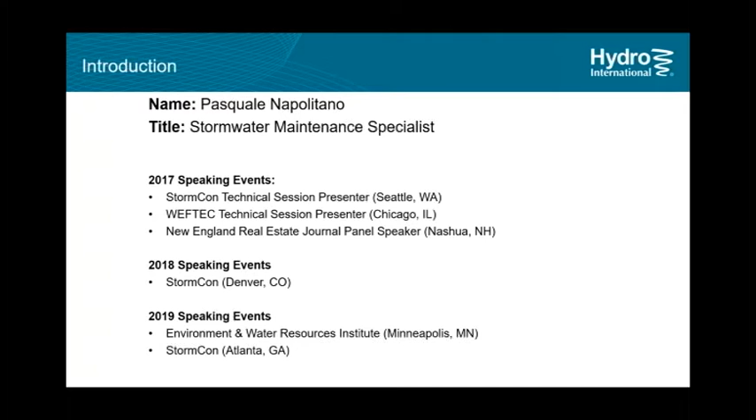So if you've attended one of those sessions before, I'm going to try to change things up a little bit more this time. I want to keep things even more visual than usual. I feel we've all been cooped up for quite a while now, so I did want to keep things a little bit more visual in that sense. So you should see some new things, but I'll also be touching on some other key points from before.

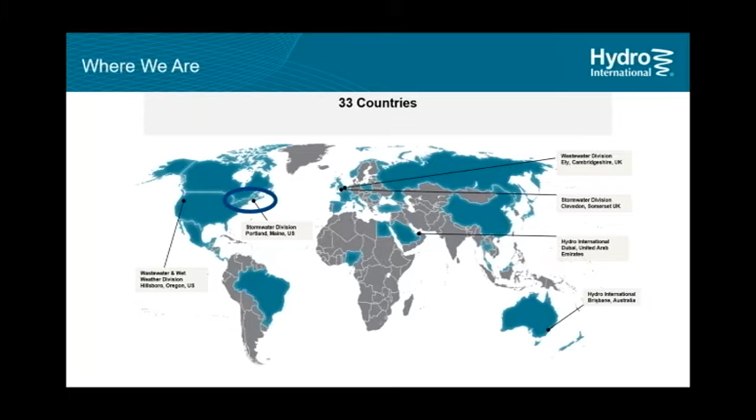As far as where we are, Hydro International, as the name suggests, is an international company. I'm in the Portland, Maine office, our stormwater headquarters for North America. We have folks all over the country, the continent, of course. I just happen to be located out of the Maine office.

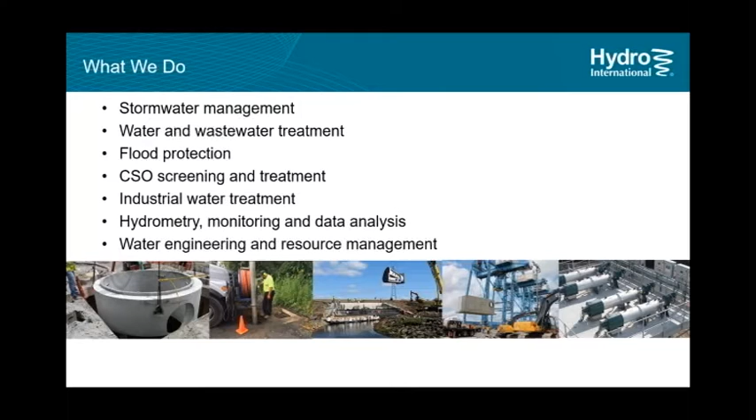What do we do? Real quick, if it's related to water, we do it. Wastewater, stormwater, CSO, pretty much everything industrial water, either on the process water side or surface water side, flood management. The Americas stormwater office has been around for 30 plus years. We manufacture BMPs. We have an in-house lab where we do testing. We have thousands of separators and filters installed across the world.

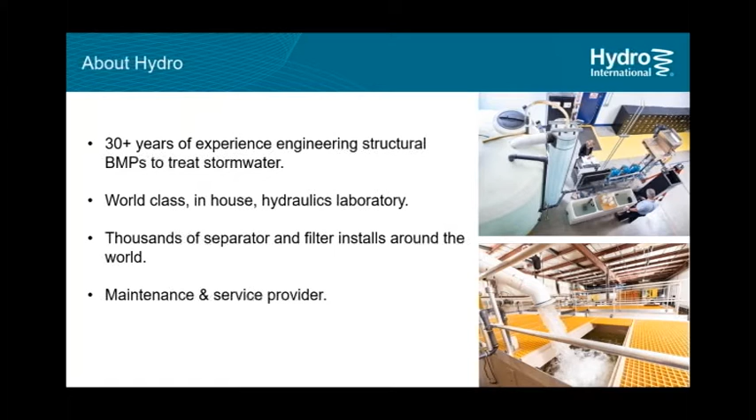And again, a maintenance and service provider. So we not only develop, engineer and manufacture treatment and proprietary products in-house, we test them in-house. We also have them installed all over, and we also service these afterwards. So we're uniquely positioned in the sense that we're working with regulators, specifying engineers, contractors, business owners, all the players involved in a stormwater BMP's life.

So why are we talking about maintenance? Well, the truth is, and I don't think this is a surprise to anyone, the majority of stormwater BMPs don't receive routine inspection or maintenance. Since we're a manufacturer, we can look at our own records, specifically for filters, because filters need to be replaced every so often, and we can see how often that is happening based on the installation base. Less than 20% are probably doing this regularly.

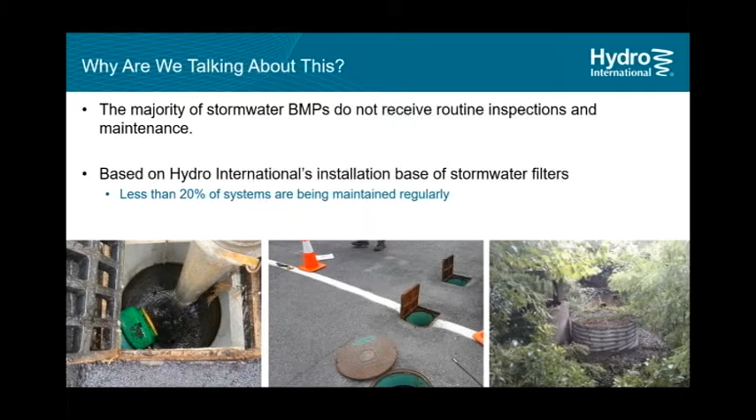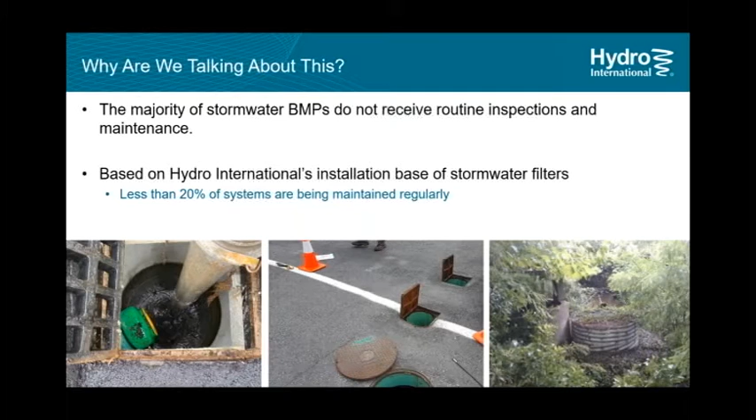Over a 5-year period, that 20% wasn't always 20%, it was lower than that before. As much as I'd like to pat myself on the back for that, it's not necessarily the case. I think the industry as a whole has been moving towards this. In some of the later slides, I intend to show you what I see as some of the driving factors in awareness and gaining more compliance for stormwater inspections and maintenance. But again, 20% doesn't really cut it. We need more than that.

What's the result of having little to no compliance? Well, if stormwater BMPs are not inspected and maintained, the structures fail. It's really that simple. Some photos here included a bioinfiltration system. You have some catch basins that are completely covered. You can't tell that they're there, or what's in there. And one of them has 7 feet of debris.

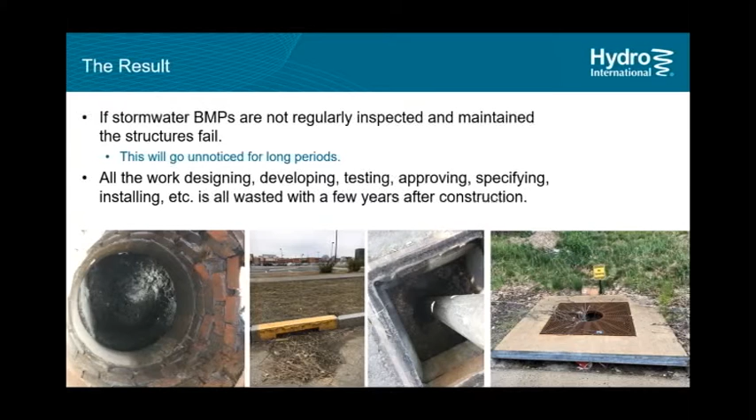This is not great. Not inspecting means that things go unnoticed. So if you imagine all the work that goes into, if you are a municipal engineer, approving projects, if you're a specifying engineer, putting in the soil and erosion control measures, specifying the product for the treatment that's needed for the site, all that work, 12, 24 months later, if no one's doing anything, it's like there was nothing there, or worse, things can kind of get out of control.

So it's really important that best management practices are seen as an ongoing thing. These are not something that just gets installed and then it's done its job and you move on. Really, stormwater BMPs need to be something that's constantly being checked on and worked on.

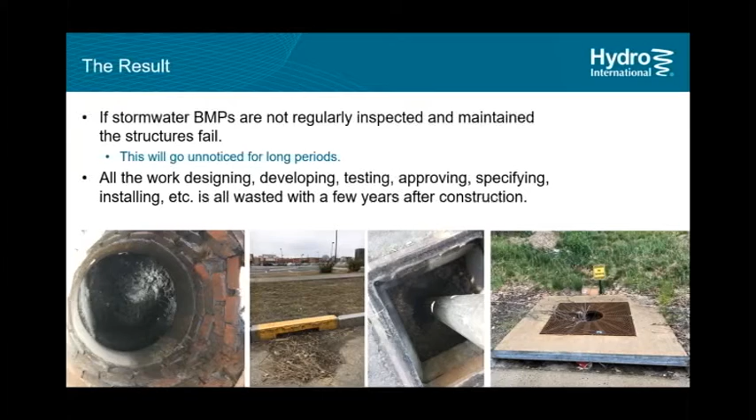Why does this happen? I've done a whole paper on this, so I won't touch on it a bunch here, but the gist of it is that there's a lot of players involved. Again, there's specifying engineers, there's approval agencies, and there are contractors, subcontractors, manufacturers involved. And in the end, maybe a developer sells the property, leases the property, properties change hands. It very quickly turns into a bad game of telephone.

And so basically the lack of awareness, and I guess lack of regulatory enforcement is unfair, but just the sense that a lot of emphasis gets put on permitting for new construction. And the same emphasis or resources often aren't given for the back end of that, which is the regulatory enforcement to ensure that these systems are being maintained afterwards. But again, that big factor is communication.

And I put the little old lady here with the plans because it's funny, but it's true. I spent almost my entire morning this morning talking to homeowners and people who represented large box stores who didn't know they had something, trying to get it fixed. So it's very common for people not to know what's going on or how it happened or that they had anything.

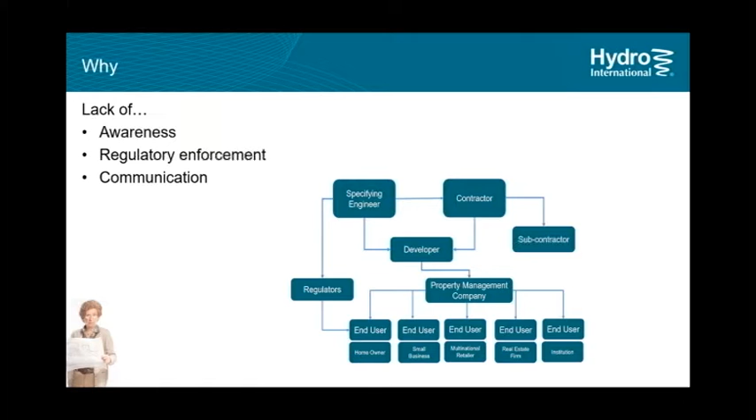To make matters worse, again, maybe a little bit harsh, but the EPA obviously has its regulations and they're vague, but not vague in a bad way. It's there to be interpreted so that local communities can interpret how they need to. Rainfall in Nevada is not the same as rainfall in Florida. So it is intentional to an extent that there's room for interpretation of how these should be implemented in various areas.

So that's not necessarily a bad thing in and of itself, but as this gets passed along, it all gets interpreted differently and people are taking different ways on how to do this. Different phase 2 municipalities are handling things differently. And so it can get really confusing and some things work and some things don't. And that confusion perpetuates this issue of people not knowing what's going on, or the end user or property owner knowing what to do.

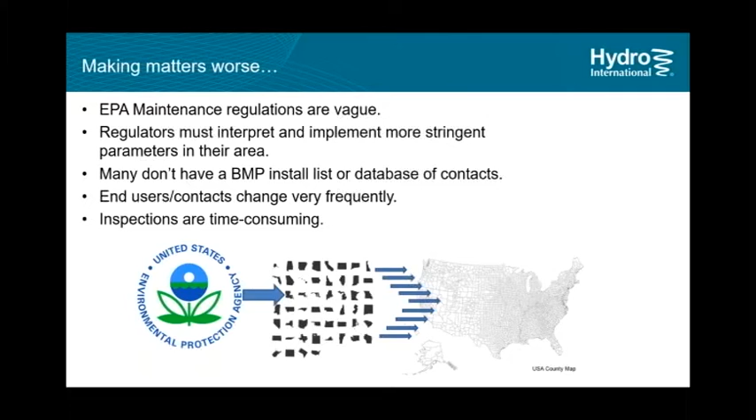Now, for the rest of the presentation, as I mentioned, I wanted to be pretty visual, so I wanted to show you case studies of BMP maintenance in practice. Before I get into that, we do have a poll for the webinar that I wanted to run. I was curious to see, out of the attendees, have you witnessed stormwater servicing or maintenance in person? It can be paving stones or catch basins or underground filter vaults or something as simple as bioretention or swales being mowed or trimmed. Is this something that you've seen before or something you don't get that hands-on with? So I'm going to attempt to run a poll here.

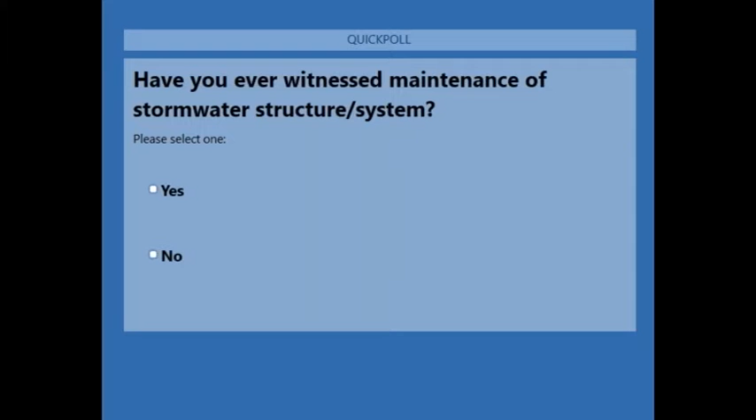Bear with me while I get it to start. All right, let me see here. I'll see if I can share the results with all of you.

So it looks pretty evenly split. About three quarters of everyone voted. More folks than not said that they have witnessed stormwater maintenance, which is good to hear because stormwater BMPs can be a whole array of things. So it is good to hear that something as simple can be seen. Maybe not everyone's seen full-on confined space entry or underground filtration services, but if you've seen something, it's certainly better than nothing. So I'll close the poll now, and I'll jump through some of these case studies and walk through what happens.

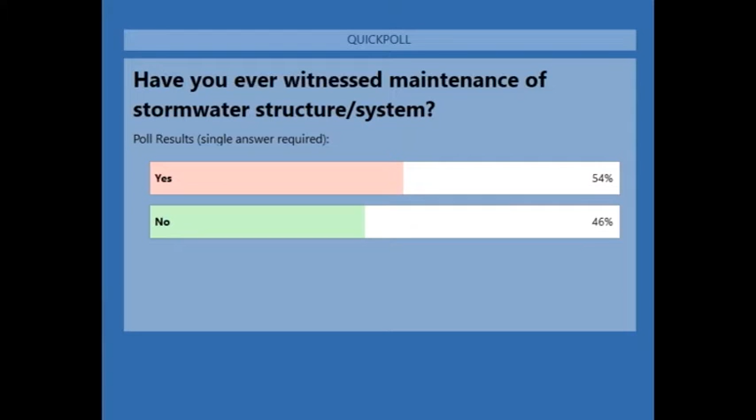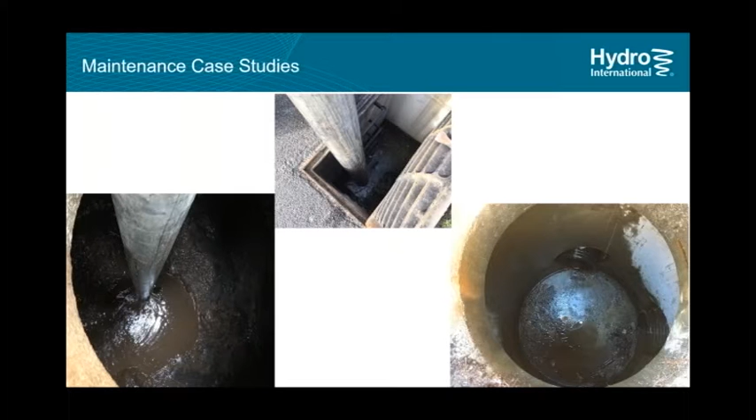So here we're going to get into maintenance case studies. Some photos here, just sort of your standard catch basin cleanings, some with more material than others. Typically, you're going to find sediment, dirt, sand, grit. You will find maybe dissolved organics, leaves, grass clippings, things like that. Trash. Those are the normal things you can expect to find, depending on the site use. If there's fueling, you may find some gasoline sheen, diesel, things like that. Or you may find worse things.

What I want to do, though, is take the more common stormwater BMPs, take a little bit of gray, a little bit of green, some proprietary systems, and take examples from across the country, from Hawaii to New York, and just give a range of what we typically see and walk you through it. So maybe you have seen corrugated metal pipe detention cleanings. You've been on site for a CMP cleaning, but maybe you haven't actually been inside the chambers or in the rows and seen what happens. So that's what I want to show you.

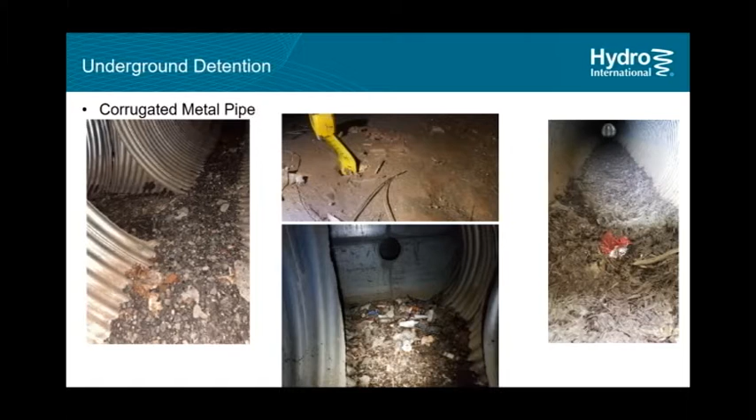Again, you get your dirt, your silt, your trash, and leaves or mulch can get in there. And again, construction debris is a huge one. Sites that have not the best erosion control measures, a lot of the stuff can get into the chambers and stay there, unknown. In the top photo there, you can see about 7 inches of silt in the CMP detention. So, how do we clean this? Well, you install maintenance manholes. Sometimes they're at a manifold at the end, sometimes they're in the center, to get down in there and clean them.

But what's important to note about actually maintaining underground detention, and it's not unique to CMP detention, is that it takes a lot of work. There's a good amount of manual labor in terms of pushing and shoveling material to where there's a maintenance access, then flushing and pumping, a combination of power washing and pumping to get the material out. So it can be labor intensive and time intensive as well. But as you can see from the photos, these systems obviously can be cleaned. They work very well for what they get installed for.

So they're great devices, but you just need to be cognizant of the fact that when these need to be cleaned, it costs money. And that's probably the biggest thing I encounter when speaking with property owners: it's not even on their radar. It's not in their budget as something they have to do. Explaining that this needs to happen in routine intervals is something that, if as a stormwater community we can get in front of, I think helps compliance along.

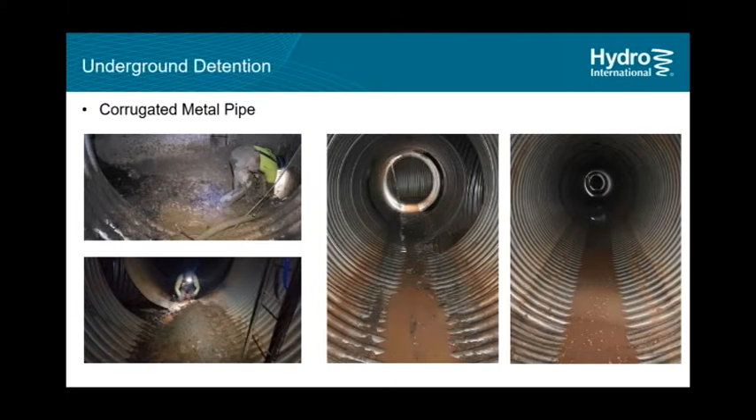Now, these systems typically don't require the same sort of manned entry that you would see with an 8-foot or 6-foot diameter CMP structure. What you would do is put a nozzle on the end of a jetter, let it run down the rows, flush it out to an access manifold, and then pump that out with the vacuum truck. But if things get blocked up, this will stop working, and sites can flood or things can break. So it's really important to inspect to know when the structures need service.

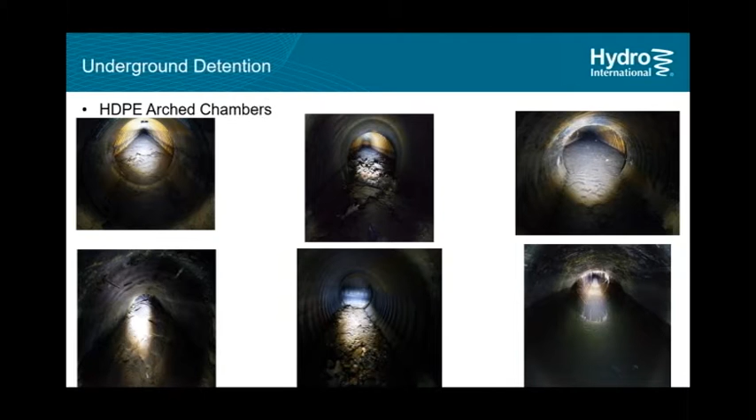Some of these types of devices, as you can see in the first photo, will have inspection ports where you can stick down and see how many inches of material is in there and whether it's ready for servicing. They tend to be optional, so these inspection ports are not always installed. I would recommend to please always put those in. It makes a world of difference. Sometimes you do just need to get into the access manhole and look down the manifold, as these photos show, to really get an idea. But inspection ports really are your friend.

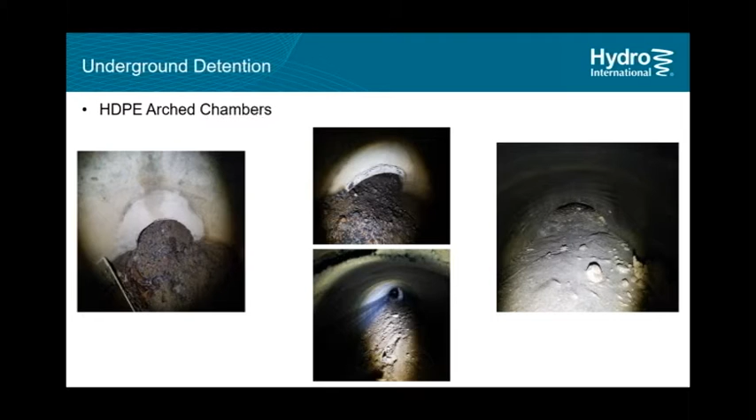Just a couple more examples of the same device that I just showed, those same rows. These are the access manholes, or some of them, that we had to get down into to see down the rows. And you can see they're just completely filled with material. So obviously the system's at this point failing or near failing.

But once you've jetted it and once you flush and you pump everything out, they're clean and they're operating again, and things are fine. So again, this is a common form of underground detention. It can certainly be cleaned, but you don't ever want to let it get as bad as the photos I just showed you.

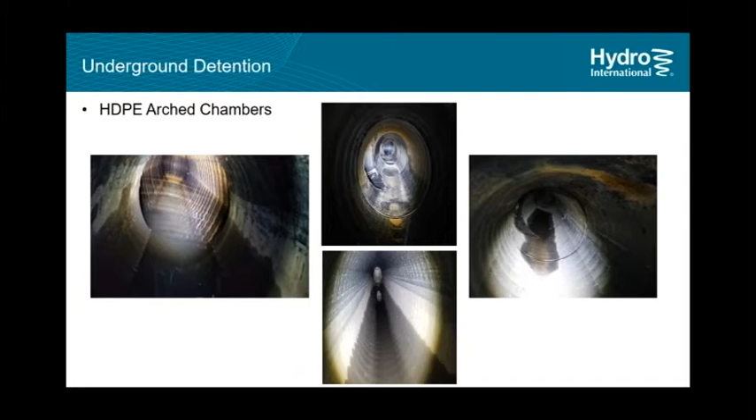How do you clean it? It's pretty similar. You power wash, you vacuum out. If you do need to get down, you have the access to do so. If you don't need to, you don't have to. This particular unit we serviced was a rather small-sized detention structure, but we do have properties that we work with, and the owners have it almost across the entirety of their pavement, their impervious area, and so that's a different animal, and that takes a lot of time.

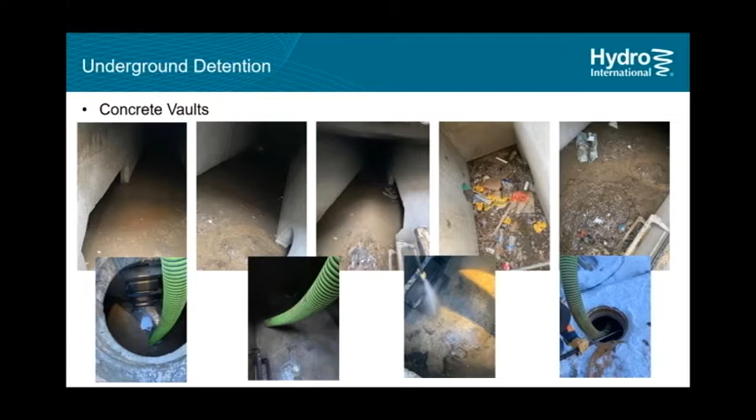But this is just to show you, your vacuum truck, power wash. If you need it, you can enter. If you don't need to, you can get it cleaned and have the system operating as it should.

I think in terms of proprietary devices, stormwater separators, hydrodynamic separators are probably some of the more popular ones. Certainly within the last 20 years, probably the most popular. You see some other devices now and approaches coming on the market, but these are the ones you see quite a bit by sheer volume of what's out there for stormwater BMPs. I would say stormwater separators, hydrodynamic separators are it.

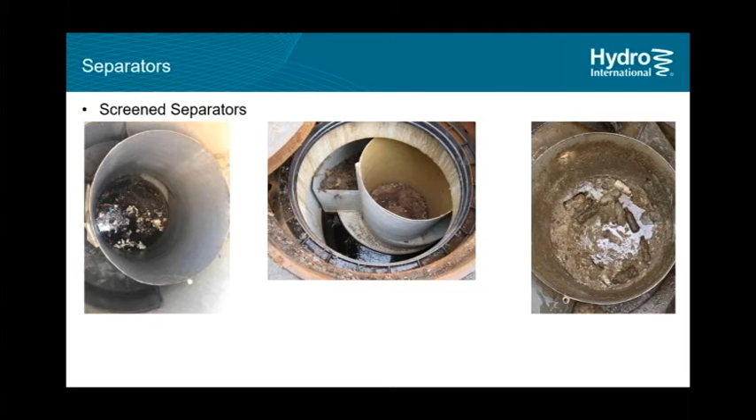These are some examples of some proprietary screened separators. See, they're doing the job, capturing leaves, trash. One example there has obviously been contaminated with cooking grease, not what it's intended for. But the key to point out is for any type of screened proprietary device, not necessarily this one, but all of them, if you're not cleaning them or inspecting them often, those screens will blind. So though the screens are great, they're helping, if you're not looking at these, they will blind, and then the whole thing won't work.

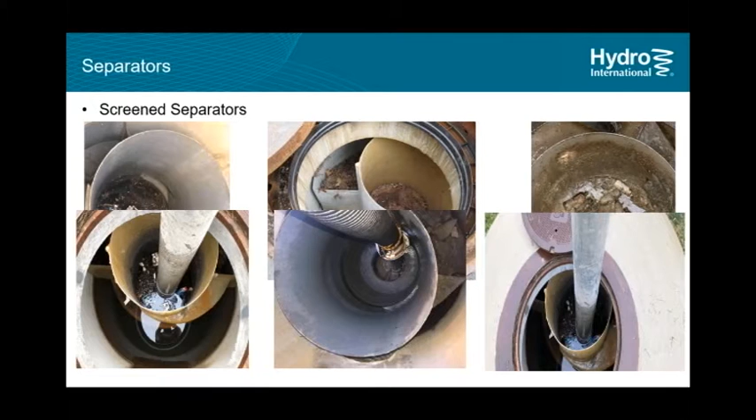Again, your vacuum truck, either a flexible hose or the standard size aluminum boom that comes down, you can clean these devices out and have them operating back to the way they should be. And I would, again, just based on how many of these are installed, these are one of the more common things. So if you've seen a vacuum truck pumping, it's probably pumping a catch basin or a stormwater separator.

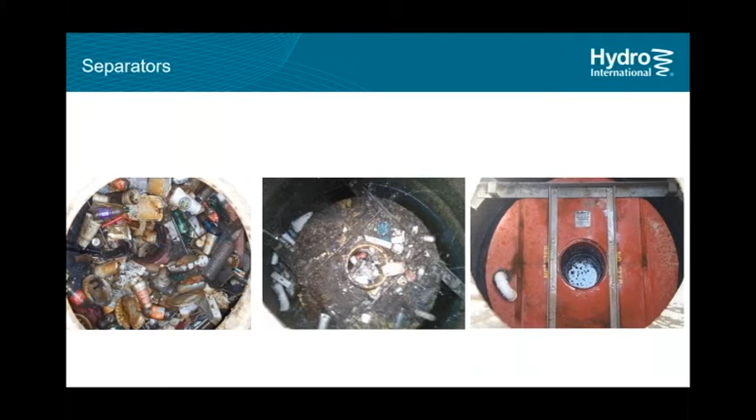Here's another model. This is a model that Hydro International manufactures. This is Downstream Defender. We've been making this for some 30 years. And again, it's doing its job. Looks filthy. It's good because it's there and it's not downstream. Oils, trash, organic debris. They get into the system, and you need to get it out. Ideally, you never see it get this bad, though, right? So yes, it's doing its job, but you want to avoid things getting to this point.

How do you clean it? It's really simple. Again, the vacuum truck, you drop down the standard size aluminum booms that go down, clean out the sump, clean out the floatable area. The structure is good to go.

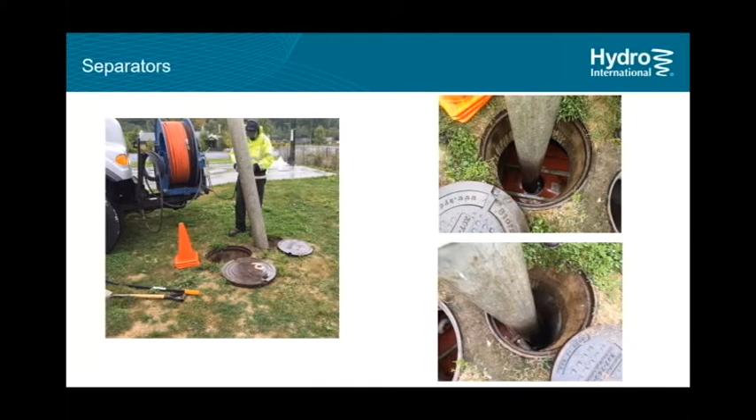A lot of stormwater separators kind of come in those standard precast manhole sizes, your 4, 6, 8, 10-foot diameters, even 12. More common in the last 5 or so years, you're starting to see 3, 5-foot variations of this. But round structures, separator inside it. These trucks can go and clean these out. For anyone who's used to doing this, it can be like clockwork.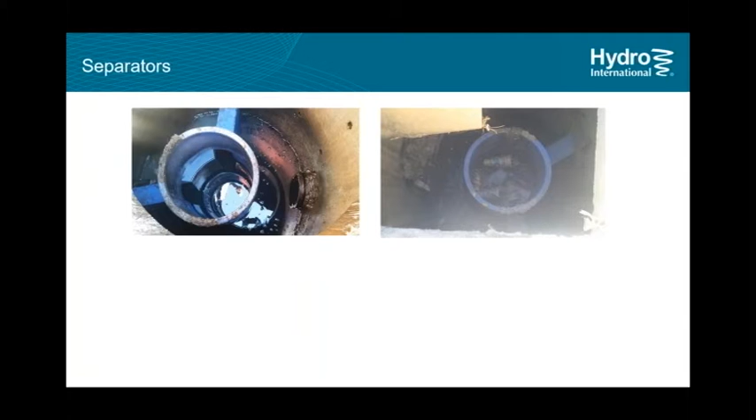And here's another model. This is a different model. Again, this is a Hydro International model. This is the First Defense, but the same idea. Here you have oil coming in, being trapped, not hitting the outfall, the outlet of the structure. Another example with trash inside there.

Same thing. Bring the truck, drop the boom, clean it out. What I will mention as well, universal to all stormwater separators, is just because you don't have a lot of, say, material on the sump floor doesn't mean you shouldn't clean it every so often, because by not cleaning it, a lot of that silt and dirt can get stuck there. You can almost create a false sump where you're starting to lose your storage volume because it's really hard to get out. So that's where the PSI power washer is really helpful in breaking that material out.

If you have a structure that's 18 feet down, that changes things. You can get a wand extension to help get down there, but in some cases, for some types of separators, you may have to enter it. And ideally, you never have to enter a separator. So preventative maintenance is way better than waiting until something gets completely full or 75% full, and then you're finding that it's very tricky to get the material out.

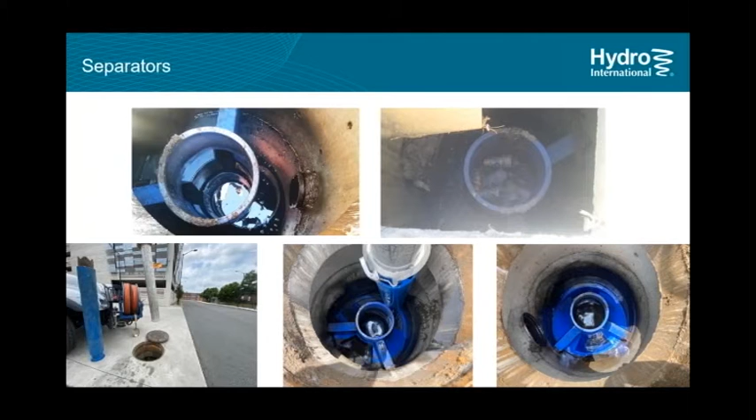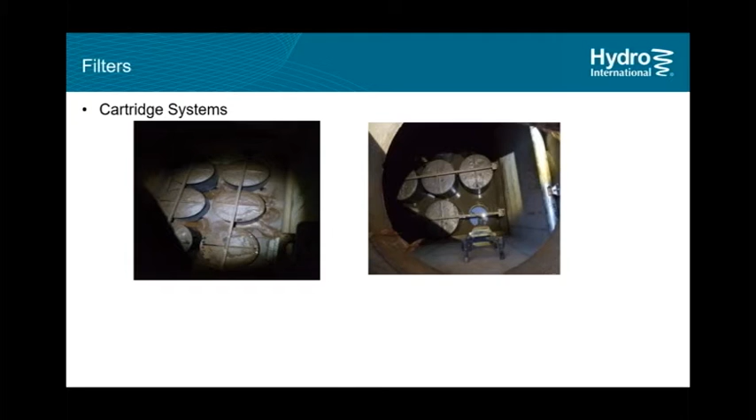Now I want to shift over to the other popular stormwater water quality device out there, which is filter systems. The first examples I'll give are cartridge systems. Again, there are several variations of cartridge filters out in the market, doing different things depending on how they're designed. You can see the examples here. Obviously, they're ready for service. How do you service? Same way, you're going to power wash to get the material off. You're going to de-water, pump that out, dispose of it.

What's not shown in here, though, is the confined space entry that's involved to then undo the carts, have them hoisted mechanically out of the manhole, and put new carts in. That's another side to filters that sometimes can get lost on the owners when it's being communicated, which is confined space entry. You need to purchase new replacements periodically, and it takes more people. Obviously, with confined space entry, you need an attendant, you need extra folks there. You need to enter in, it takes more time. So there are more costs associated with the filter just by nature of what it is.

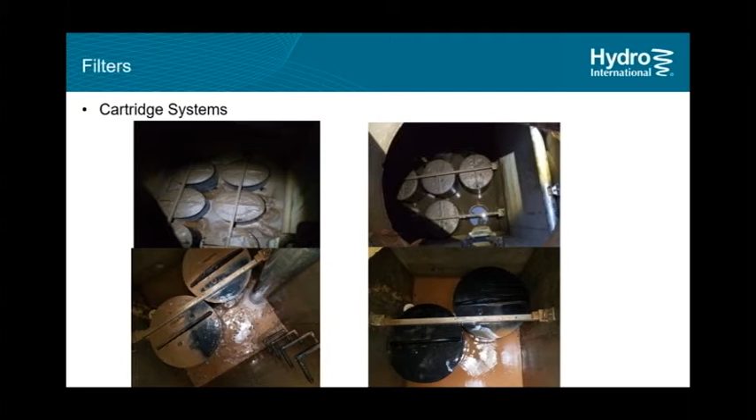But filters, by nature of what they are, can sometimes do a little bit more than what a separator can. So again, depending on what you need to use, filters are great. It's just setting the expectation with owners as to what this is after.

Here's a different model of cartridge filter. Similar idea, cleaning out the vaulted structure, the precast structure, getting the carts removed, vacuuming out the material right from the carts, power washing the carts off, exchanging the carts to be refurbished, and getting new carts on site. Same thing though, needing the assistance mechanically to help lower and raise the carts in and out of the chamber. That's part of what's involved in this.

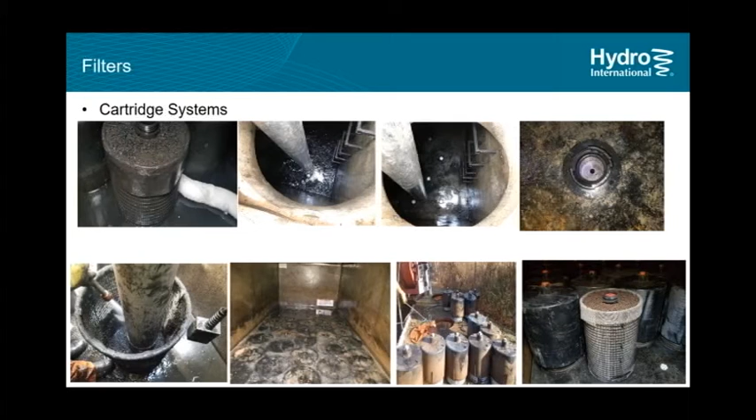Needing to coordinate when our new carts are arriving. Are we going to have the carts out above grade, ready to take off and to put in? If it's a large mall, you have the space to do this. That's great. If it's not a large property, do we have space to have a bunch of carts out in the parking lot while we're doing this? So these are sorts of things you may want to consider. But again, here's the process to clean them. You power wash, vacuum, get inside, hoist things out, get things back in.

More recently, there's been a lot of membrane filters on the market. I'll just touch on one model here. There are several. Similarly, again, you're going to start to see the theme here. The vacuum truck will suck out the water and sediment. You'll need to power wash the inside. There are some different variations depending on the manufacturer as to how to best service a membrane filter. Some will suggest removing them from their housings, power washing them off, and putting them back in.

But ask questions: how feasible is that, or how long can you expect that to maintain? The power washer can be pretty powerful. Do you damage the filter from that, or what's the lifespan after you've done that a few times? Those are the sorts of questions you may want to ask. If you're doing it within the chamber, that means you're sending someone down into the structure. That's confined space entry. If you're bringing them above grade to do that, you still need to get someone down there to pull them above grade. And then if you're power washing it up on the surface, where's that water going? That's another thing you need to be concerned with.

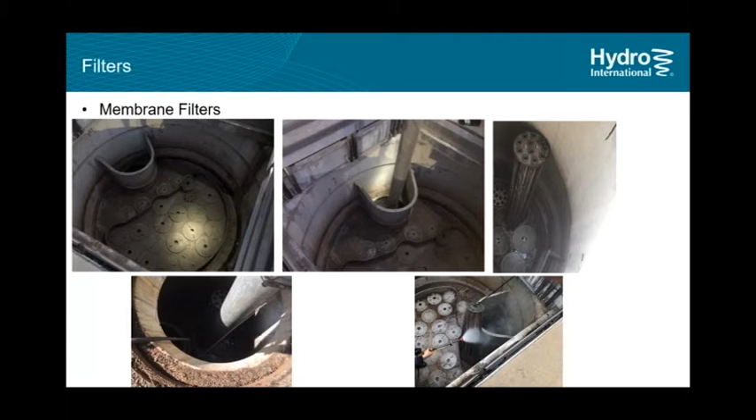And then of course, when the time is ready, changing the filters themselves out. So membrane filters, a variation on stormwater filtration, with some different things that are involved with them. They can be cleaned by anyone who knows what they're doing in that regard. But just be aware that there's a little bit more to it, or it's a little bit different than a cartridge filter or some other types of filters.

And the last example for a filter I'll give is media-based filters. These are Up-Flo Filters, Hydro International. These are ones where a single person can hold these bags, take out the spent media, bring them above grade, and put new bags down into the structure. This is an example that's pretty versatile because it can fit into a 4-foot round manhole, but there are also variations of large vaulted structures similar to the other types I just showed you.

So same thing, you need someone down in there, you need to pump out, you need to power wash. The nice thing about this, similar to some of those carts, is that you can just vacuum up the material after. It's not hazardous, of course, provided there hasn't been a spill or something on site, so easy cleanup and being able to get in there. It's just a different animal from a cart filter. Again, you don't need that mechanical assistance. You do still need the vacuum truck with the power washer on it.

That hasn't changed. Provided the system isn't incredibly shallow, you are still going to need to have some confined space entry to some extent. So that's filters in general: confined space entry, vacuum truck, replacement filters. Those are things to keep in mind when you're looking at these. If you own them yourself, if you're a municipality, if you're a specifying engineer looking to install these for an owner, ask the questions: when does this need to be changed? How much does it cost? And how frequently should we be inspecting these?

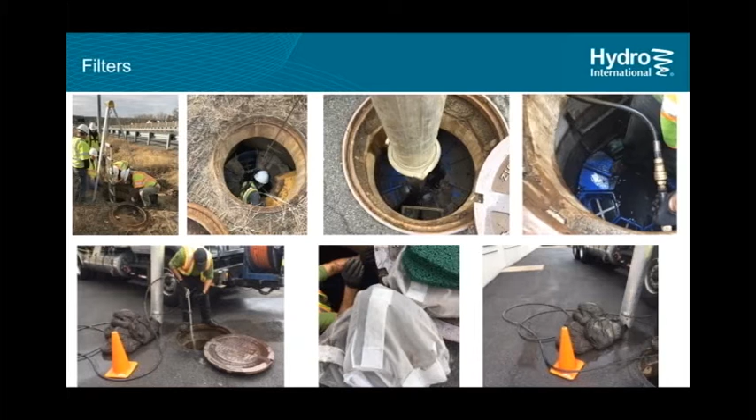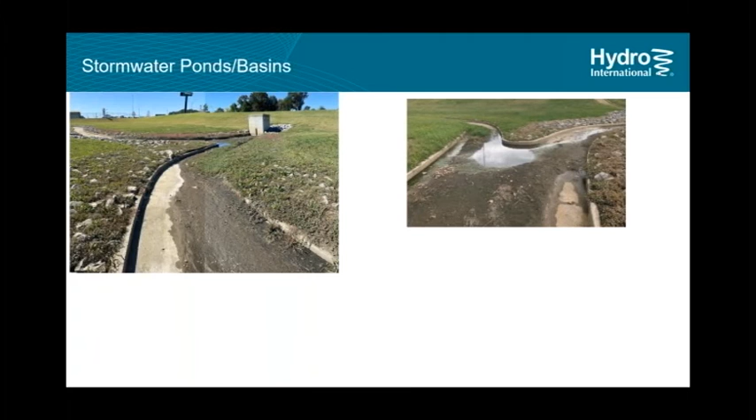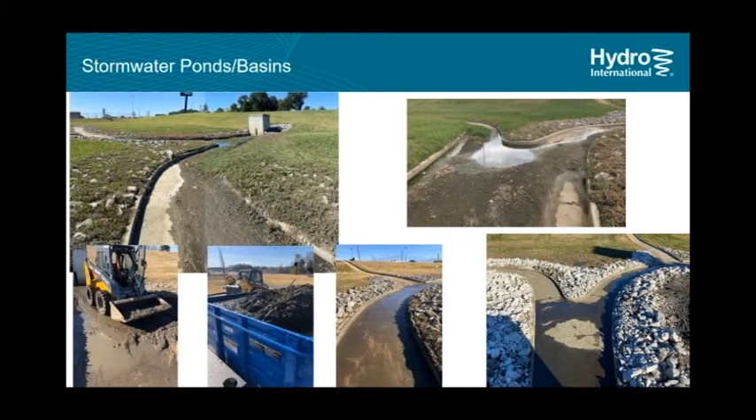So how do you fix that? Again, the concrete channel does help in the same sense as a manufactured treatment device. The grade does help confine things to an extent, but you also have to imagine if you have 300 cubic yards or more of earth you have to remove, then adding new riprap buffer and stones. It may take time. It may take more money. And it can certainly be done. These are just the sorts of things to keep in mind that can happen or will need to happen, even on sites that are routinely inspected and relatively well maintained. If it can go wrong, it may go wrong. So be aware of that.

And the last example, I believe the last example on ponds I'll give here, here's some stormwater ponds. It's sort of a mix of a wet drainage channel and a dry basin on the right, where you can't really tell it's a basin, right? It's completely overgrown. Saplings turned into trees and the pond sort of disappeared. The fence is falling down because they dumped snow there in the winter, which can be fine. But if you don't know that there was ever a pond there, that's a problem, right?

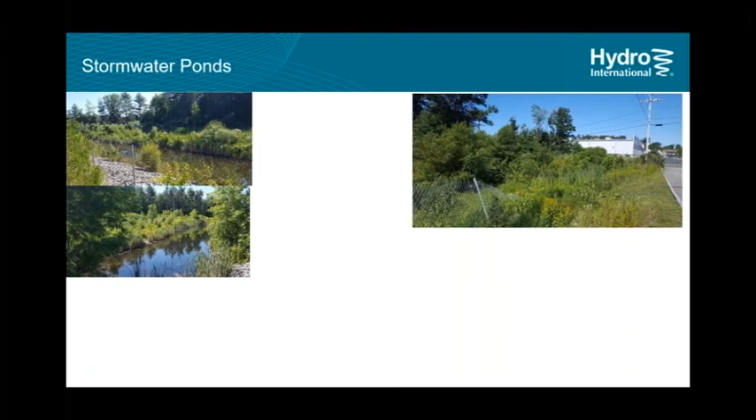And so this is both those structures, on the bottom row showing you the structures being maintained and serviced. One of the things I'll mention from this one is once you've done this, you may not be able to identify the inlets or the outlet control structure or the trash racks because overgrowth is so bad. So what can happen is you come up with the scope, you try to help the customer get things cleaned. Once you've cleaned things, you find, well, look, your inlet's damaged and the rack needs to be replaced. So there's things like that that can happen over periods of neglect.

There are ways to try to help business owners or property owners as well, though. If there are saplings that have grown into decent sized caliper trees, and they're not interrupting the actual embankments, well then maybe you can keep those if they're not hurting anything. So there are ways around that. There's ways around trying to reuse the spoils and to chip spoils of wood onto parts of the property that don't turn into dissolved organic issues in wet ponds. If you can have that in the areas that get reseeded with grass, you can try to lower costs that way for owners. But it's all case by case basis.

Again, low impact development, it's way more variable than you would see with the manufactured treatment device. And that's just the nature of them. They all have their place, but just being aware of what the other side of that equation is really helps.

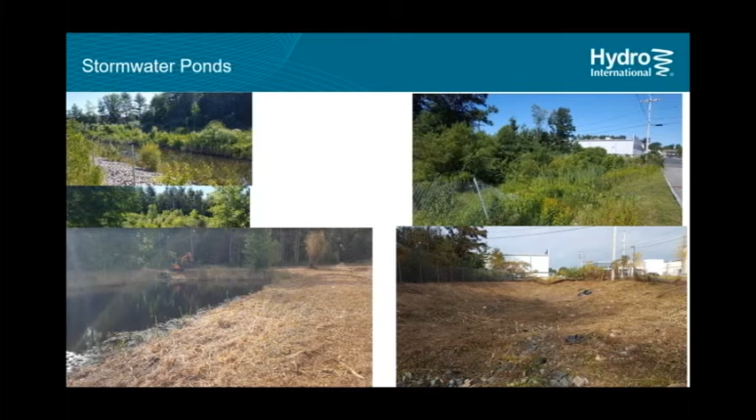And this is the last example I'll give. Again, it's needing to flail the vegetation around the structure, reestablishing embankments, reseeding. Again, it takes time. This particular example is behind a supermarket, so I know a lot of times there's talk about low impact development: you can see it, it's above grade, it's not underground where it gets forgotten. Well, this was forgotten because it was behind the building and no one was going back there.

So that theory doesn't always hold, and having a routine plan in place really helps mitigate having to do this. You may have to do this at some point, just by nature; every 10 years maybe it gets to this point where the embankments are formed in a way where you need to just reset it, and that happens, but you don't want to be doing it every 2 years, right?

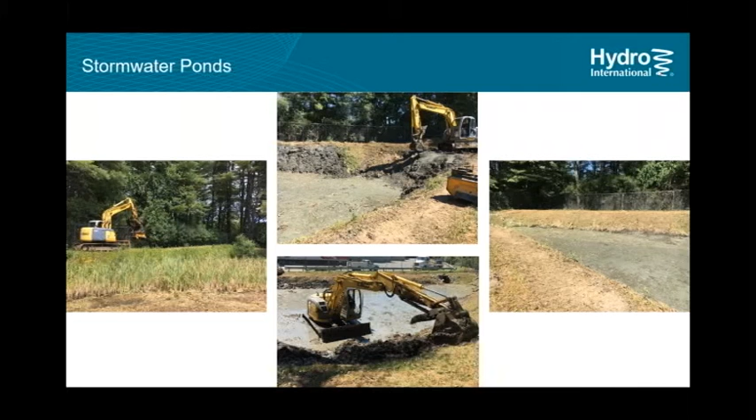Okay. So those are some examples and some case studies. Again, I just wanted to walk through some of that. If you know how that works, I apologize for having to listen to me drone on about it. If you haven't seen any of that in action, I hope that helps. I think we've all been kind of cooped up, so being able to see photos of what's happening in the field, I hope that helps. Previous presentations I've done a little bit more showing site plans and how it works specifically. I imagine a lot of you have been staring at site plans for 12 months and not photos like this. So I wanted to give you something new, so I hope I did.

Now, what's working? What's the current state of stormwater maintenance and compliance? There's some things that are really working. There's things in the state, county, city, municipal levels, and I want to dive into a few of those.

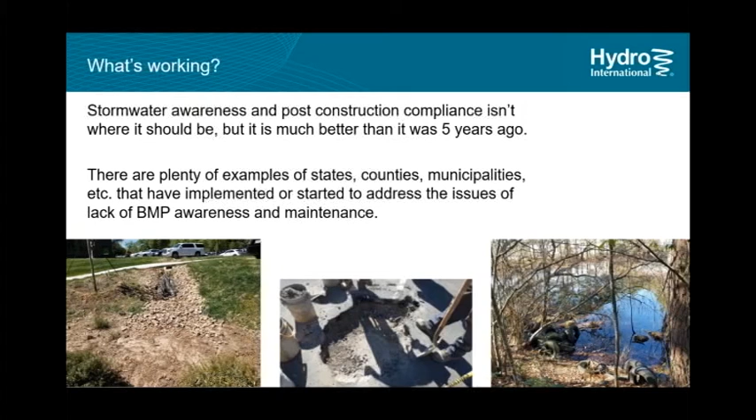It's probably a little misleading, though, showing you some failed BMPs here. You have erosion into a bioinfiltration basin, a manhole cover for a separator that was paved over, no one could find, tires in a pond, and an overgrown pond at that. But good things are happening, and let's look at those a little bit.

One of the things that's great and a lot of places are doing is getting in front of it. You see this a lot on the county level. I think these phase 2 areas are really coming to terms with this and trying to get in front of it. This is a state example, a dated one, but it still holds. This is from the state of Maine. They do a 5-year contract, but most counties and municipalities across the country will see an annual version of this.

But at the time of permitting, either for construction or certainly for occupancy, having something in place that binds the property owner, the county or the local authority, and even if you can, a maintenance provider or inspector, to work together to say, okay, for this period, we're responsible. We acknowledge responsibility for these structures. This is just one example.

There's lots out there, but I think this is the bare minimum you can do if you are a municipal or local government and you're trying to come to grips with how to get in front of this and start managing your stormwater BMPs that you don't own, but your taxpayer base owns. This is the bare minimum you can do.

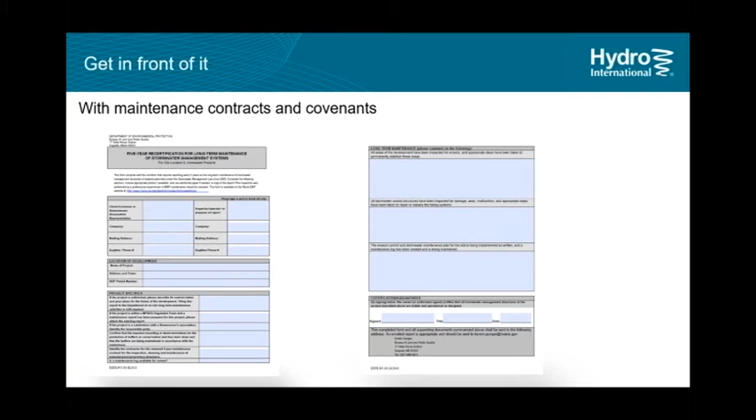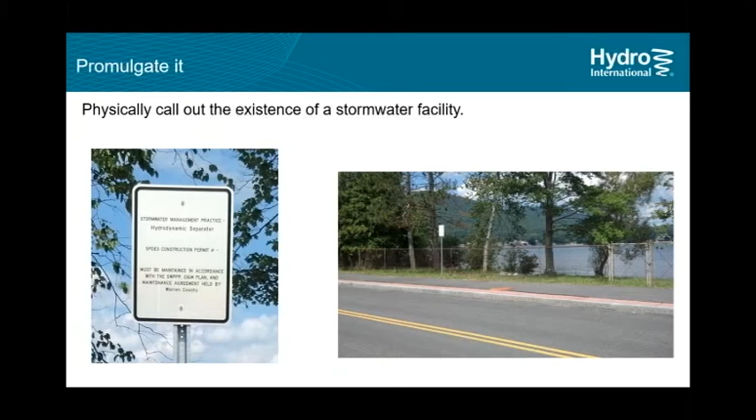If you're a local municipality approving construction projects, this is a great thing to implement. If you're a specifying engineer, there's no one stopping you from doing this too. You may be doing your clients some favors in some cases, because they may not know about it otherwise, unfortunately, after 2 years goes by from the project being started to completion.

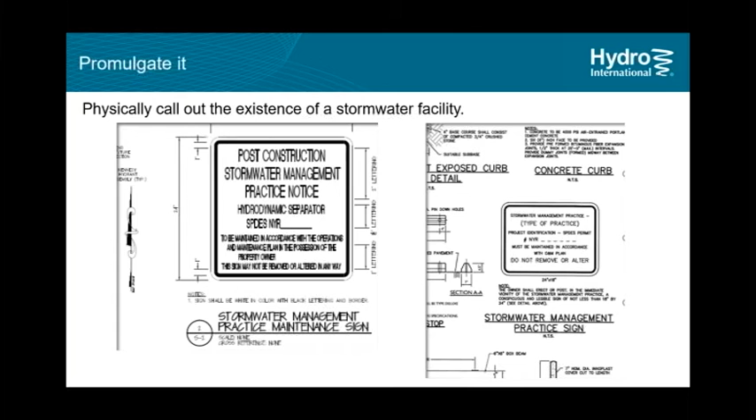But really, awareness and outreach are the big thing. This is another example I've given before. There are some really great examples of areas in the Pacific Northwest and parts of California that have done a great job. Parts around Maryland, some counties around there as well, are really doing a great job of showing what is stormwater. What's your responsibility? What do you have to do?

The example I like giving, though, because I find myself on here quite a bit, is the St. Louis Metropolitan Sewer District and their BMP toolbox. This toolbox is great because if you're a homeowner who has a rain garden, and you've heard of stormwater, you pay a tax for it, but you don't know what it is, you can go here and learn more. If you're a specifying engineer and you need to know if this filter is going to cover the requirements, you can find that here.

If you are a service provider for post-construction maintenance, and you need to know whether this proprietary device requires confined space entry, this website's going to tell you. It has everything for all audiences. They've done a really great job of including everyone who would ever need to know about this in one place. I recommend, if you haven't been there, to check it out.

If you have your civil plans and a project number, you can go on the website, punch in the project number, pull up your civil drawings if you don't have them, and say, okay, this is actually what they have registered here as BMPs that I have. So it's awareness, it's access, it's outreach. It's done in a great way. It's certainly not the only one. There's some great ones out there, but it's just one example I'm showing.

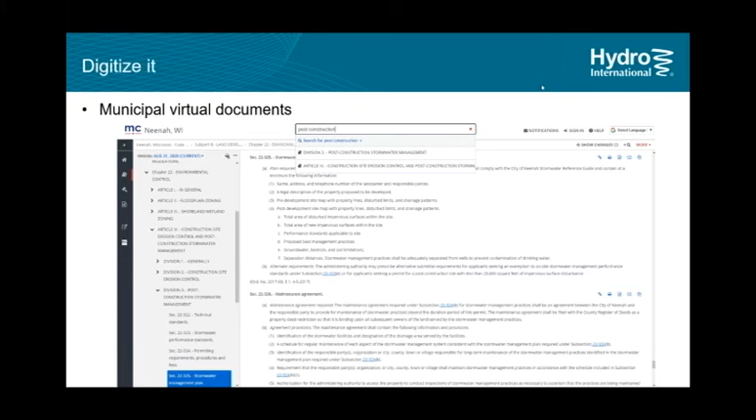And then the other thing that's happening a lot, again, more so within the last 5 years, is GIS mapping, taking advantage of what we already have to show what's there and what's installed and things like that. So I'll just go through quickly some examples of, the different plots of properties are outlined, what's there, and you can click on that, you can type in the address, find what you need. These are all examples from all over the country as well.

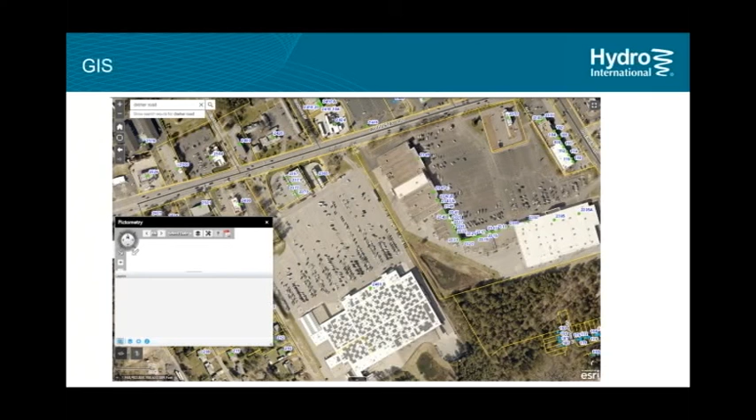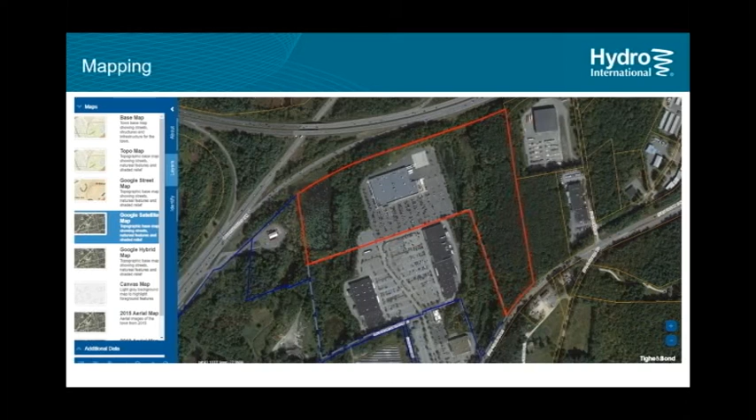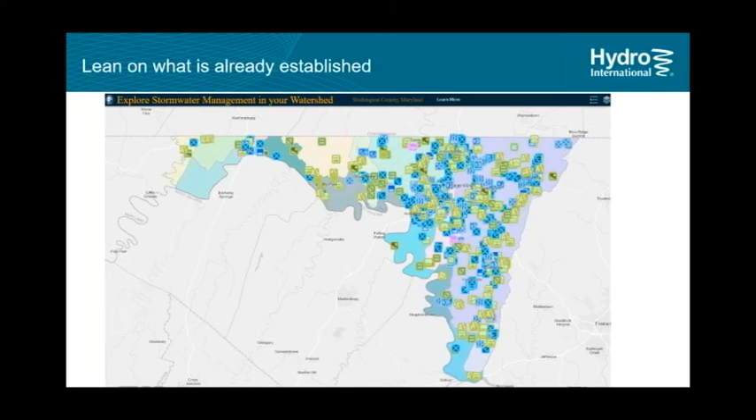Different properties, then you can sort of identify, is this pond my responsibility, is it not, is it part of that property's responsibility? You can do it at the county level, the state level, the municipal level. Sometimes a lot of the information overlaps, but you can look in more than one place if you can't find what you need, and sort of zoom in and drill through what you're looking for.

And this just kind of goes back to what I had mentioned before about the St. Louis BMP toolbox. This is a client we were working with who received an NOV but didn't know for what, because it was just given a BMP name and they didn't know. It's like, well, look, we go on the website and check. Well, you have pervious paving stones, you have a swale, a pond, what was the number? You can match it to the number and say, oh, well, what they're concerned about is your pond. So now you can start focusing in on what needs to be serviced by tools like this.

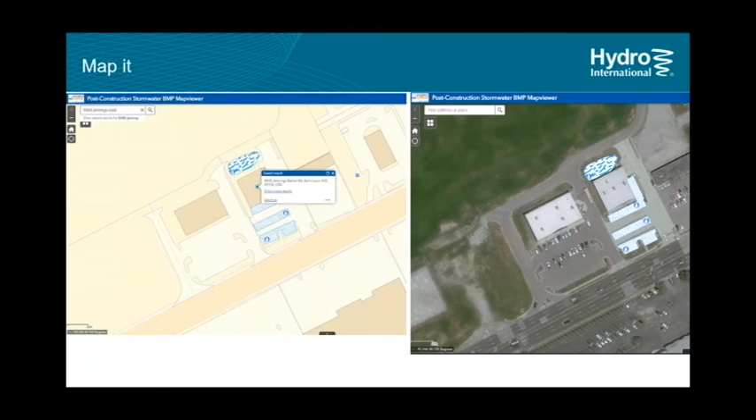So these tools are great. If you're not aware of them already, they're there, use them. And if you're someone who can help implement these in your area, I'd recommend looking into them. And then there's obviously third-party software that can really help maximize the benefits of this, where you can have reports being done off of a smartphone, uploaded automatically, integrated into that GIS system, into those mapping systems.

And it's really great, especially I think for municipalities. It's something that's a really great tool. There's a whole slew of these out there. There's been more popping up each year. Again, I think this is the way a lot of things are going to be moving towards in the future.

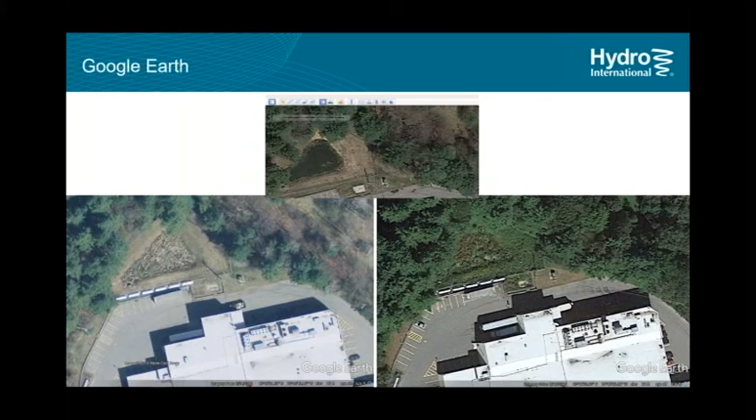But you can see when structures are first being built. You can kind of see the life cycle, at least as far back as these things go. They usually go back to about the mid-90s, and you can see how a property progressed and if there were structures there, at least structures on the surface.

Hydro International, we've been doing some things. We're certainly not the only ones, but with data logging, water level sensoring, things like that. One of our colleagues here came up with a system where we could install a stainless sleeve and slide the logger into it. If it needs an antenna, there's one there that's ASTM rated. It can be driven over, and it's flat and it won't get in the way of things.

Companies like East Jordan make special manhole covers that fit that in there so it can be flush. If you're worried about snowplows pulling one of those things off, it can be flush with the manhole lid. We're using it in places like Honolulu, where you're trying to say, well, is the tidal influx affecting things? Is it backwashing into structures?

Or in other instances, we're using them to see how the filters are operating, whether at these water levels the filters are activating, are things going to bypass, and then crossing that with NOAA data to say, well, there was a huge storm event that was unusual at that period, and we know that. That helps, especially multi-sector general permit holders when reporting, to say, look, this was the storm, and this is when we sampled, and nothing was designed to handle that.

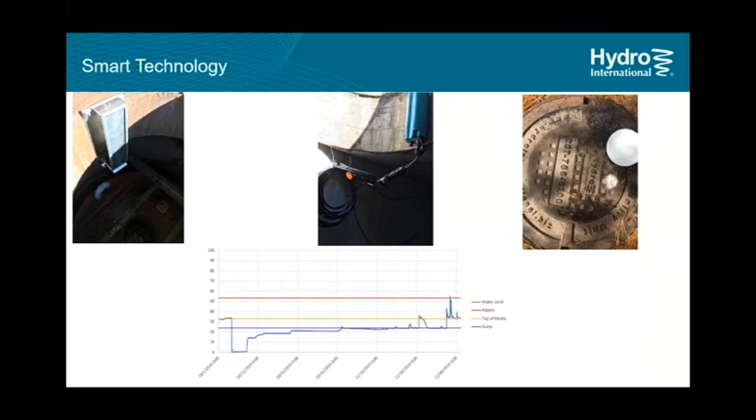Or we know our media is spent because we can see that the drain down rates are getting slower and slower. So things like this will also be something I expect to see more of in the future.

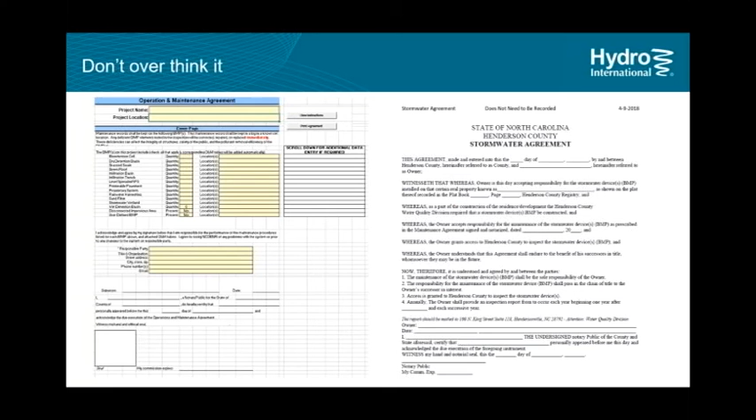But again, if I can circle back to it, just don't overthink it. You don't have to get too fancy. Here's some examples again. Just Excel sheets that can be downloaded off of local government websites. You can pick what you need for the type of BMP you have, just a simple PDF with a covenant saying, okay, I'm responsible for this and I acknowledge it. You can have it notarized or not. You can have a maintenance provider in there or not. But these sorts of things are bare minimums that I think nowadays everyone can do and implement.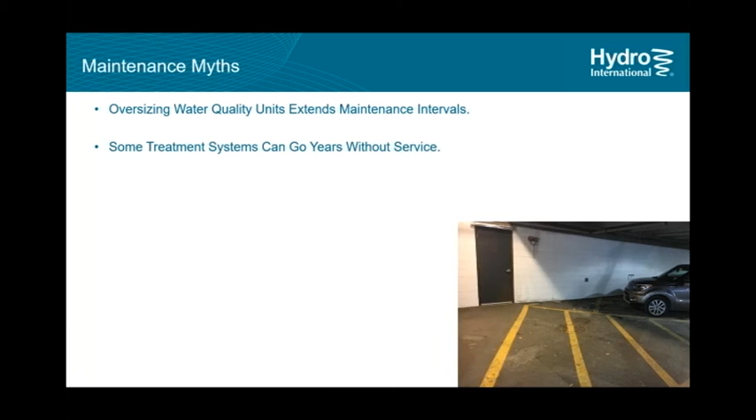It talks a little bit about oversizing units to extend maintenance. Not necessarily the case. Some systems going years without service. Not necessarily the case. Self-cleaning systems don't need to be maintained. Again, these are myths. So I talk about these a little bit more and explain why those conclusions are drawn and if they're valid or not. Usually they're not flat out lies. They just need a couple more questions asked.

But some others: not needing new media for certain types of filters, low impact development being more cost effective. Yes and no. If you're maintaining it routinely, maybe. If you're not maintaining a pond at all, and then in 3 years you need to bring in excavators, well, it's actually not more cost effective. So again, there are qualifiers in a lot of these myths, but that's a downloadable packet that I suggest checking out.

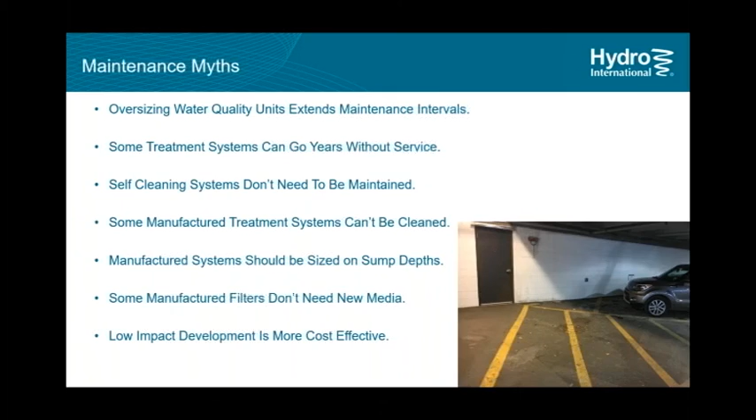There is no magic answer here. The only way to really know, can a system go X amount of time without needing maintenance, or X amount of time without needing a new filter, or whatever... anyone who tells you, yes, it can go this long without needing new media, it can go this long before needing to be vacuumed. No one knows. Anyone who's telling you that is not telling you the truth.

It's just not the case. The only way to know is to inspect. That's it. There's no other way. So routine inspections will tell you how your system is progressing, and then you won't be surprised if something's failed. You can see things on the horizon, and you can intercept and get in front of these things and mitigate large costs moving forward by having routine preventative maintenance every so often.

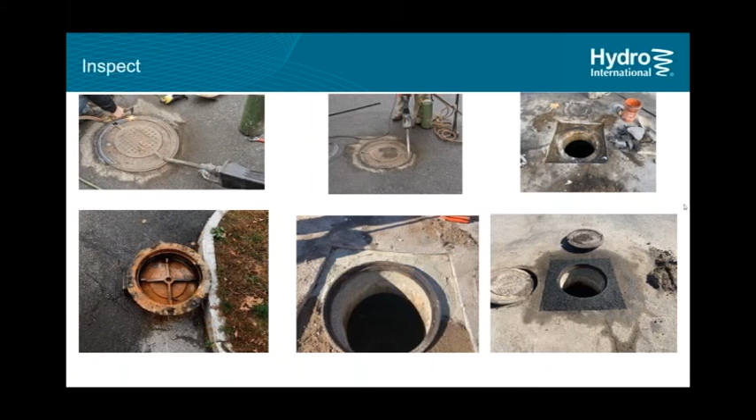The example I gave here was actually a local one. One of our units was installed some 12 years ago, and clearly no one had been inspecting it. As a result, we could not get the manhole lids off. We tried using the torch, jackhammer, everything. We eventually had to cut out the frame and put in a new frame. The unit itself wasn't damaged. It was full of material, but it wasn't damaged. But if you can't get the manhole lid off, that probably means you're not opening the manhole lid often enough.

So to close, what is it that you can do moving forward? As I just mentioned, there's no reliable indicator other than routine inspections. There's periodic operational or preventative maintenance, such as seasonal vegetative mitigation for green systems or low impact development, and catch basin cleanings, probably at least once a year. Some areas maybe twice. Depending on the usage, maybe not once a year. Maybe it's 18 months, 24 months. But knowing that it has to happen at a certain period is really key. That preventative maintenance will save you from corrective maintenance that really costs a lot of money.

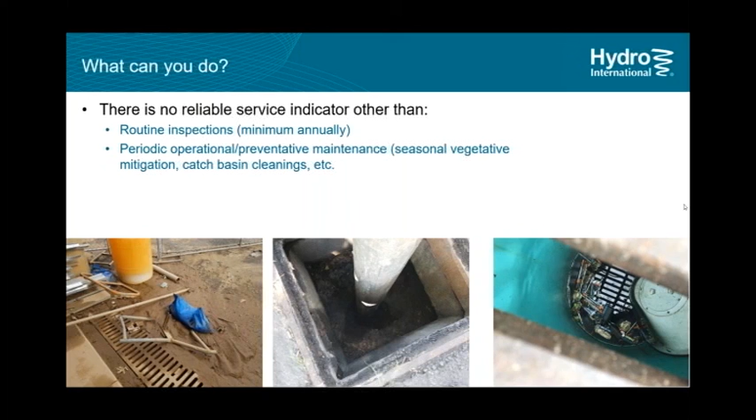And again, you see here poor construction erosion control, catch basins full of material. And here's a structure that doesn't have a lot of material and wouldn't raise a lot of flags, in the sense that there's not a lot of sediment in it, but it has hypodermic needles. If no one's inspecting that, no one's going to know those are in there. These things are in these systems. So it is worth mentioning that without inspecting, you're not going to know any of that.

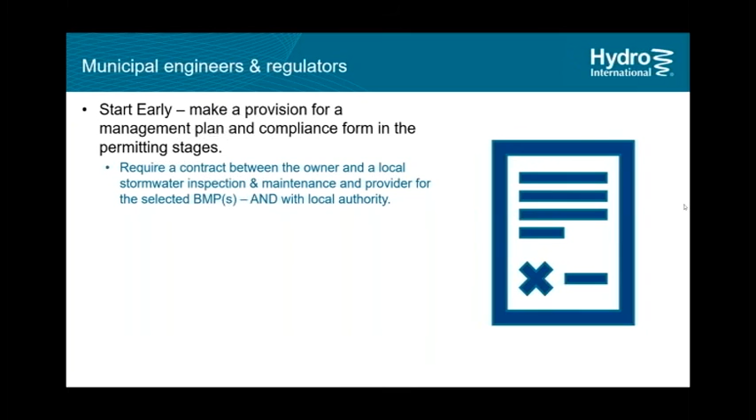Again, in closing, if you're a municipal engineer or regulator, plan to start early, getting some sort of plan in place in front of owners. A compliance form of some form is the bare minimum. Requiring a contract between the owner and yourselves, the local authority, for the selected BMPs is key. Decide, is this something that needs a third-party inspection program? You don't want to gatekeep out the owners from doing things they can. You want to empower the owners.

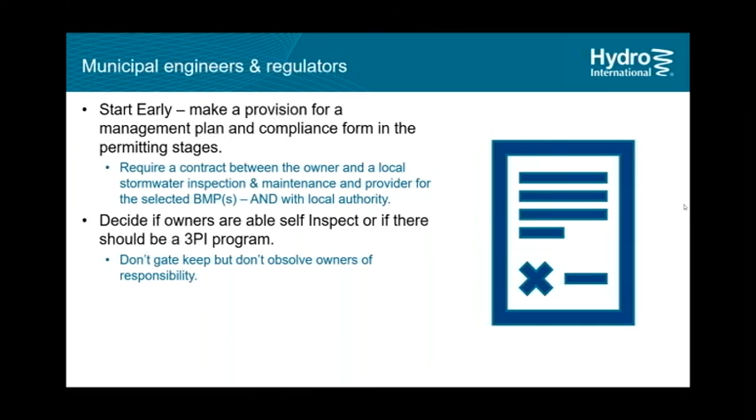But if you have a filtration system, you can't expect an owner to be going down into the manhole and inspecting whether this filter is working. So when they send in a random photo of the manhole lid or the lid removed and a form saying we did this, be aware that there's no way you did this yourself, because someone needs to get in there and look at this media and see if it is holding up. So use better judgment. Do we want to gatekeep people out of certain things? Rain gardens, maybe an owner can handle. Filters, detention, probably not. But again, I would say the minimum inspection requirements are key.

A lot of places do an annual minimum. The problem, though, is that local authorities or enforcement agencies do not have the resources to follow up on those annually. So they follow up every 2, 3, 5 years, doing spot audits around counties or areas. But what are you going to do when someone hasn't done it for 3 or 4 years? Their system may have failed, and now they're looking at a lot of corrective maintenance. Slapping them on the wrist with a fine doesn't necessarily help that at all. The damage is already done, really.

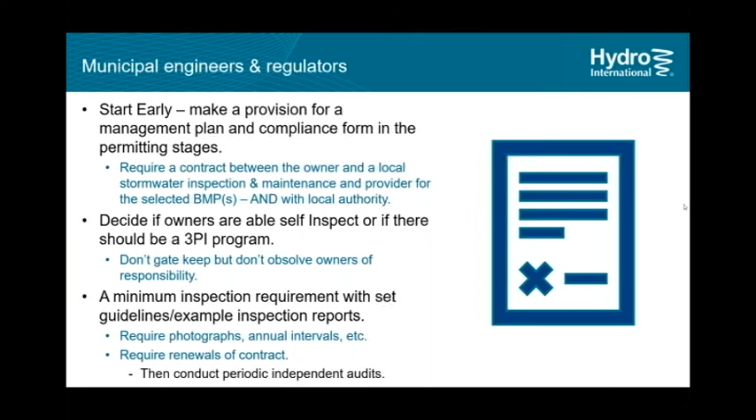So staying on top of that and using some of the technology that's available to keep track of that is really key. Moving things off of physical paper and spreadsheets and onto some of these types of software that are becoming more easily available and economic is huge. If you're a specifying engineer, be specific, ask questions. The BMPs that I'm looking at, are these approved? If these are approved by WDOE, NJCAT, these types of agencies, you can rest assured that they can be cleaned.

They work because they've been approved, in the field, in the lab, etc. These manufacturers have spent a lot of money and time making sure these systems work right. And to that point, ask the manufacturer, ask them for a service estimate. It's not reasonable to get an exact price during the proposal phase for a project, but you should be able to get a ballpark and an idea of what things are going to look like.

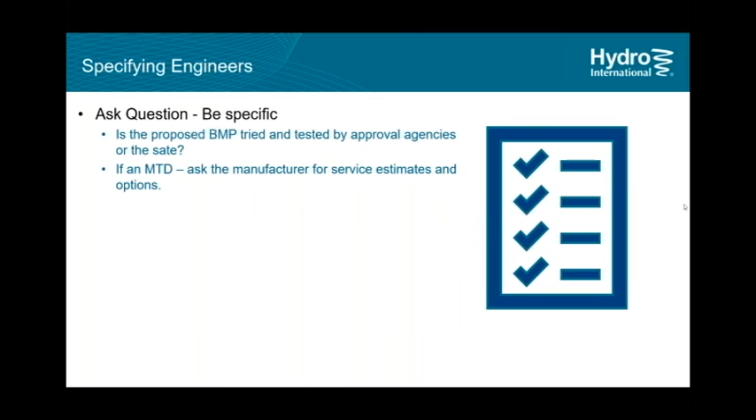If the manufacturer doesn't do that themselves, they should have someone easily available right away that you can talk to, someone who they work with who can offer you that or give you a budget for that. And as I mentioned before, can this be operationally maintained? Are we putting this inside a parking garage and we can't get a truck in there and we can't clean it? Things like that. Yes, it's cheaper to do a low impact development here, but is it really cheaper in the long run?

And again, who's responsible for this post-construction? Is this a developer who's going to sell the property, so he signs the paperwork for the county, it changes hands, people don't know about it? Is it being leased? Then the owner and the tenant argue about it. Trust me, I've seen it. Who's responsible? And really, is there a legitimate inspection and service plan in place?

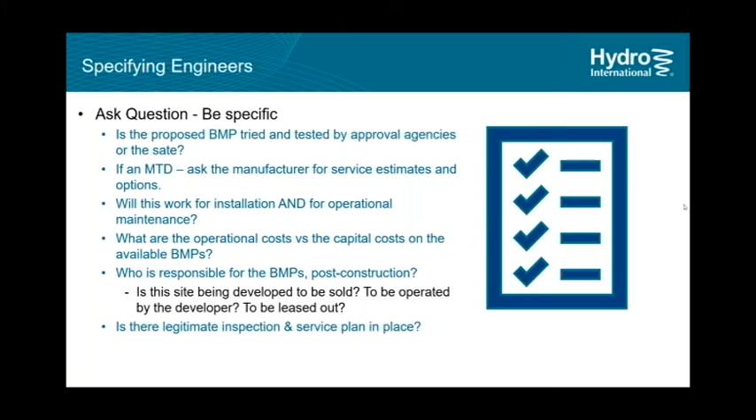Again, with the stormwater management plans and the SWPPPs, there'll be charts and tables saying weekly, monthly, quarterly, yearly things that need to be done. But don't just check the box. Say, look, do you really have a plan in place? It's going to help you. Because once you're done with the job, the last thing you want is the owner coming back later and saying, hey, I have these problems, I don't know what's going on, your name's on the title block, can you help me? You want to know that they're up and running on their own. So putting in a little bit of extra effort earlier saves a headache for everyone.

And again, if you are an engineering firm and you feel that you can do inspections, especially on sites that you've designed yourself, do that. But then team up with a company that does actual maintenance with trucks and equipment, so when it needs that, you can team up with them. If you don't want to deviate from your core competency, you design jobs and you don't want to be out in the field inspecting, then don't. But also go find a company who will do that and team up with them so you can know that your owners are taken care of moving forward.

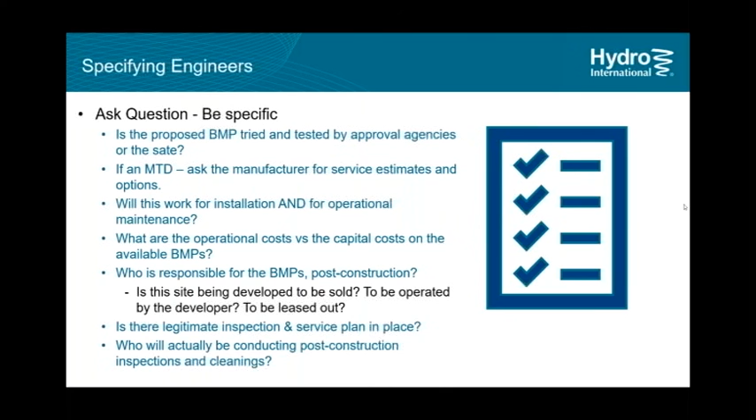So that's pretty much the webinar. Try to leave it on a positive note. Some happy duck family here, some clean water. I guess the key really, though, is to educate and empower owners. It's really easy to forget that most people don't really know about a lot of this, and it's getting better. People know stormwater more now than they did 10 years ago, for sure. But it's still slow going. A lot of businesses have had hard times this last year, we certainly saw it with a lot of people we work with. But it still rained. So these things still need to be cleaned.

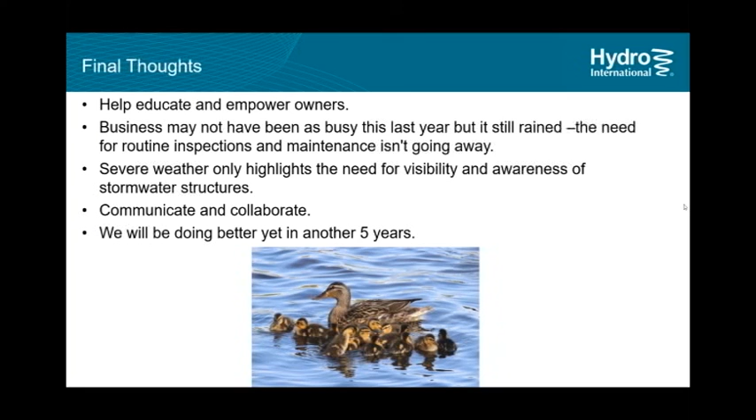And if anything, severe weather like we've seen recently, and we could throw a dart at the map and pick an area that's had it, just shows how much more we need to be on top of this. So as that comes to the forefront of people's minds, if we stay on this message of stormwater inspections and maintenance and compliance, that will rise up with it. And I confidently believe within 5 years from now, 2026, we're going to be looking back saying things got even better than in 2020, 2021. More people know about it. There's more compliance. Not where it needs to be, but we're on the right track.